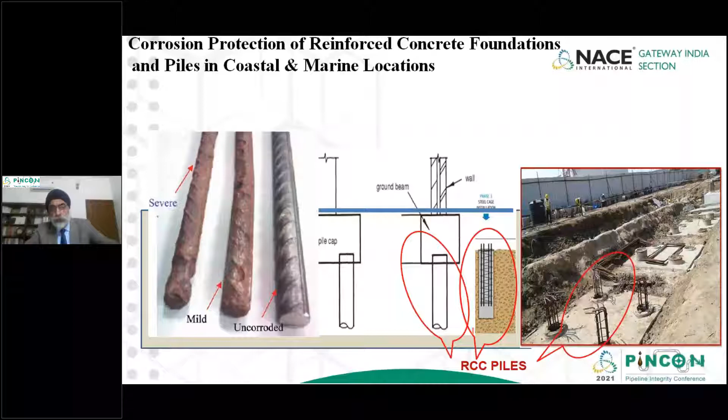Same way in refineries, specifically in the coastal area, as India is building a lot of new infrastructure, the pile caps which support above-ground storage tanks and heavy equipment need to be properly protected so that the rebars do not corrode, which can compromise the integrity of the pile caps or RCC piles, and thereby endanger structures like tanks from collapsing. Hence, ensuring proper corrosion protection of the steel rebars is extremely critical in today's environment.

As I said, reinforced cement concrete is highly stable because the reinforcement becomes passive due to the alkaline environment of the cement. So in normal cases, the steel reinforcement should not corrode - the cement acts like a coating to the steel rebars embedded in it.

But due to material limitations, design and construction practices, and severe exposure conditions of the soil - wherein a lot of chloride ions are available - the ions penetrate into the concrete cover and start the deterioration process of the rebars. As rebar corrodes, its volume increases, cracking the outer surface of the concrete and allowing moisture, chloride ions, and other corroding ions to come in contact with the steel, leading to rapid corrosion of the steel rebars.

So the photograph on the left hand side, you can see the cover of the concrete has completely gone. The rebars are exposed to the atmospheric environment, which also causes a high corrosion rate. This is the process which, as professional engineers, we have to stop. We have to stop the steel reinforcement in the concrete from corroding, to ensure the integrity of the pile caps, pile foundations, and equipment foundations in coastal and marine locations.

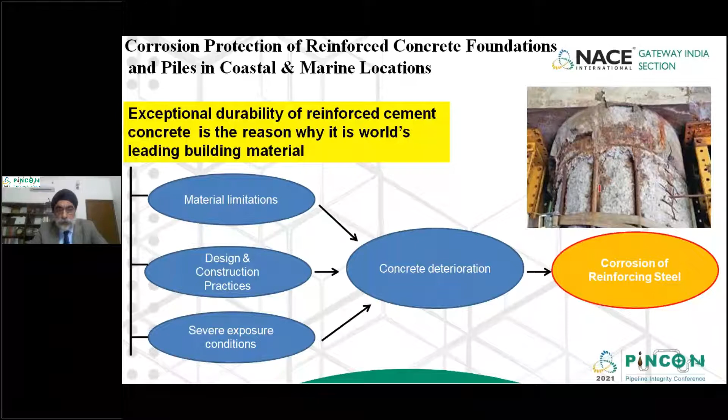Normally, steel in concrete does not corrode because the cement provides a natural protective film which prevents the steel rebar from corroding. The elements which cause corrosion on the rebars are primarily three: chlorides. Chlorides destabilize the passive film, leading to a localized breakdown and cause rapid corrosion on the rebar.

Above ground, carbon dioxide in the air basically penetrates through the concrete cover. It lowers the pH environment around the steel rebar, which causes the loss of the passive film on the rebar, and again starts the process of corrosion.

The third element in refineries which can cause corrosion on the rebars is DC stray currents. In refineries, cathodic protection of buried piping has become prevalent. Protecting the buried piping in a refinery or petrochemical environment can cause DC stray current corrosion on reinforcements near the anodic gradients. If proper design is not done for cathodic protection of the plant piping, it can endanger the concrete piles and pile caps which would be in the anodic gradient of these anodes.

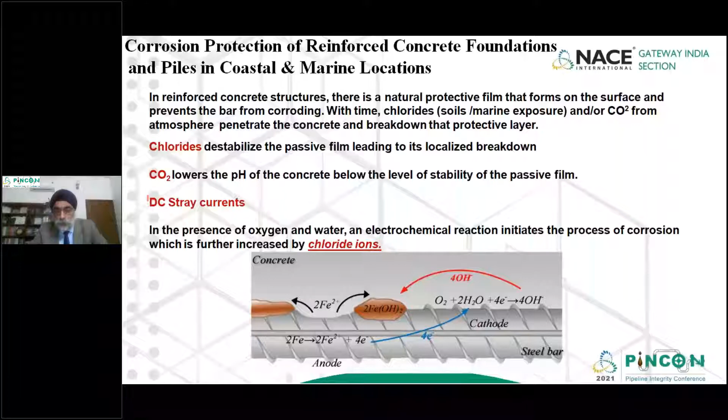So the design engineers should be aware that while trying to protect the buried steel piping, or trying to protect the tank bottoms of large storage tanks, we can cause stray current corrosion on nearby concrete structures, leading to rapid deterioration of these structures. These three factors should be kept in mind while ensuring that the steel rebars do not corrode, to ensure the long-term integrity of concrete structures in a refinery or petrochemical environment.

So typically, this slide gives you an idea. There is a rebar which is embedded in concrete. The rebar is showing no corrosion, and the integrity of the concrete structure is well maintained. Due to chloride ions over a period of time diffusing through the concrete cover over the rebar, this starts the process of corrosion.

When the corrosion process starts, the rust pushes the concrete up, leading to formation of cracks. When cracks get formed, it forms a direct path for the outside environment, which is primarily soil, to leach into the foundation and start accelerating the process of corrosion on the steel rebar.

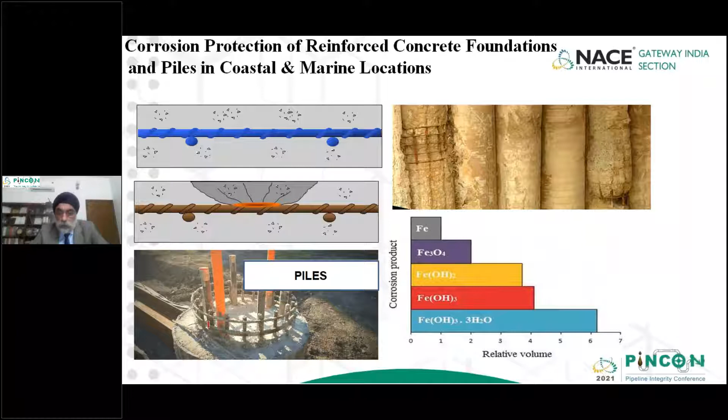This slide basically gives you an idea of what I've been talking about, how the rebar corrodes. On the left-hand side is the first photograph, showing a rebar indicating a passive layer, which is built due to the cement around the rebar. Over a period of time, in the buried structure, chloride ions diffuse, and on the atmospheric side, if the structure is partly buried and partly into the atmosphere, carbon dioxide in the atmosphere diffuses to the concrete.

Both these basically damage the passive film and start the process of corrosion. Chloride ions obviously start the corrosion process much faster compared to carbon dioxide impregnating through the concrete in the atmospheric zone. So when the chloride ions impregnate, they form rust.

The rust, as I said, is 6 times the volume of an Fe ion. That pushes the concrete and starts the formation of cracks. Now this becomes a repetitive cycle, causing the concrete to crack and eventually fall down.

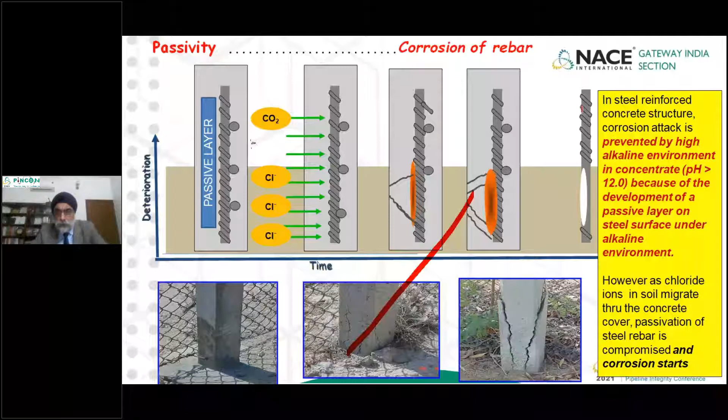Once the steel gets exposed to the environment, this is what is going to happen. The diameter of the rebar starts to reduce, and then eventually the reinforcement steel will collapse, causing the collapse of the concrete structure. This photograph exactly depicts what I've been telling you.

You can see how much is the reduction of the thickness of a rebar. So once this gets compromised, the entire concrete structure can collapse. As you would have heard in India many times, in Goa, we have seen bridges collapsing. It primarily collapses due to the reinforcement getting corroded in a saline atmosphere, and hence the necessity to ensure that

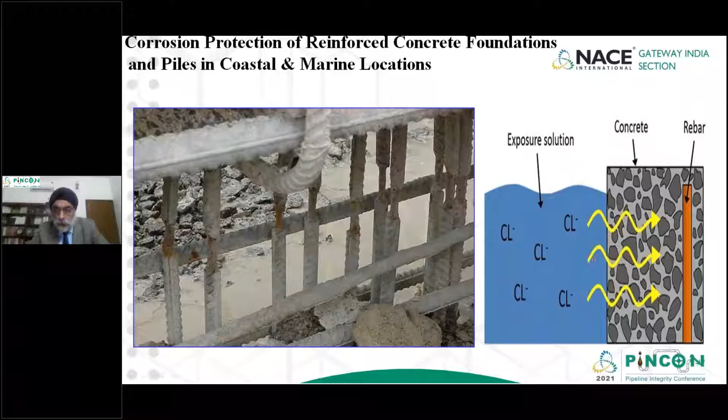Now this photograph again shows or conveys the same message which I have been discussing. Moisture enters through the hairline, rust begins to form. Rust, which is ferrous hydroxide, basically has 6 times the volume of the initial formation of the rust.

This pushes the concrete up and causes a complete breakdown of the concrete cover, exposing steel directly to the environment, leading to either crevice corrosion or pitting corrosion. Now, both these corrosions have very high corrosion rates. They are not dictated by normal corrosion rates.

The corrosion rates can almost be 0.5 to 1 millimeter per year. And if the rebar is about 16 millimeter or 25 millimeter, in 10 to 15 years in a corrosive environment, the rebar diameters can reduce considerably, which would compromise the strength of the concrete, causing a catastrophic failure.

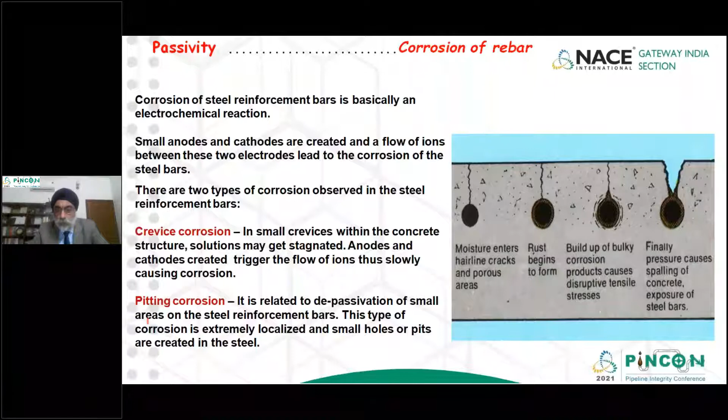Now, how do we check a concrete which is embedded partly in the ground and partly in the air, whether the rebar is corroding or not? So we all understand the science of measuring, in our terminology, what we do: pipe to soil potential. The same terminology or the same systems are used for checking what is happening on the rebar without removing the concrete. ASTM C876 provides a relationship between the measured potential values and the corrosion probability.

So what we do is we take a sponge, we take a copper sulfate reference electrode, put the sponge on the concrete, put the reference electrode in a copper sulfate solution so that proper electrical connectivity is made between the concrete and the copper sulfate reference electrode.

The copper sulfate reference electrode is connected to the multimeter the same way we would connect a pipe, and the rebar is connected to the positive of the multimeter the same way we would connect a pipeline. Now, the potential, what we read, if the potential is

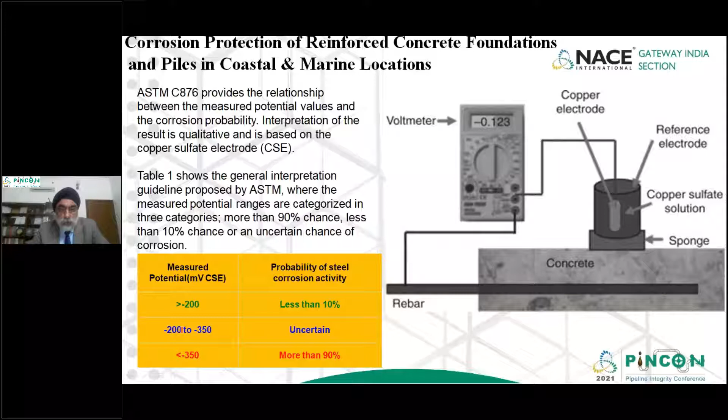So by doing this simple test, we can really find out if the rebar within the concrete is in a passive zone or is it in an active zone as far as corrosion is concerned.

Now, the way we have potential ranges of steel in soil, where we know that between minus 0.3 to minus 0.7, steel is corroding, but a potential of minus 0.3 volt in steel shows that the steel is cathodic, and minus 0.7 shows that the steel is anodic. Same way, by measuring the potentials of steel in concrete, we can find out what is the condition of the rebar in concrete.

Depending on the status of the concrete, it can either be humid but chloride free. If we measure potentials between minus 200 to plus 100 millivolt with respect to a copper sulfate electrode, it gives us an indication that the concrete is chloride free. If we are measuring potentials between minus 600 to minus 400, we know that the chloride is contaminated. If we are measuring between minus 1000 to minus 900, the concrete is saturated with water, but there is no oxygen. And if the concrete values are between minus 400 to plus 100 millivolt, the concrete is carbonated.

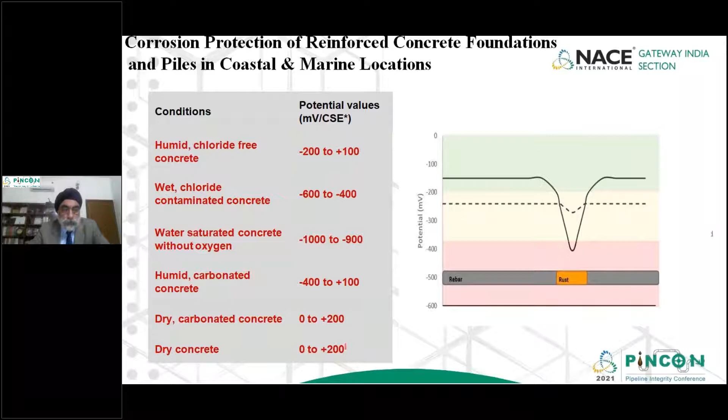So by logging in these values of the potential of steel in concrete with respect to copper sulfate electrode, we can find out the status of what is happening in the rebar, the same way we do measurements of pipe in soil. This is a very important test to be conducted by engineers to ensure that the steel in foundations or steel in pile caps are not corroding.

Now, having determined the status, we have to look into mitigation measures. Typically, the story is the same as we do in pipelines. What we do in pipelines, we have a coating. Apart from coating, we apply cathodic protection. So if you apply the same story onto a rebar embedded in concrete, the corrosion protection mitigation measures of rebars become very easy to understand.

So this is a rebar casted in concrete. The distance between the rebar and the outer surface of the concrete is called the concrete cover, and it is embedded in atmosphere where chloride ions are floating around, which can either be soil or an outside atmosphere. So how do you protect the rebar? Either you do a coating, or you apply cathodic protection, or you do a combination of both.

That's one strategy. The other strategy is to apply a coating on the concrete surface, between the concrete surface and the soil. Another strategy is to put in corrosion inhibitors, which would not allow corrosion to occur on the rebar and will keep the rebar in the passive state. We can also put in some chemicals within the concrete, which would reduce the permeability of the concrete, meaning it would not easily allow chloride or sulfate ions to move from the soil into the concrete and hit the rebar. So these are various strategies which can be adopted to prevent corrosion of rebar.

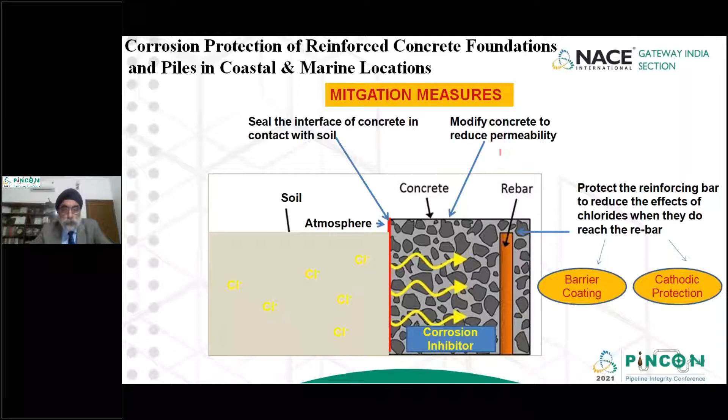The basic strategies anybody would adopt: use a high performance concrete which would inhibit moisture and chloride ions from hitting the rebar, provide coating between the concrete and the soil surface, called concrete surface protection. The third strategy would be to do a rebar coating, meaning you coat the rebar. The fourth strategy would be to do cathodic protection of the rebar. And the fifth strategy would be to put corrosion inhibitors in the concrete, which would keep the surface of the rebar passive.

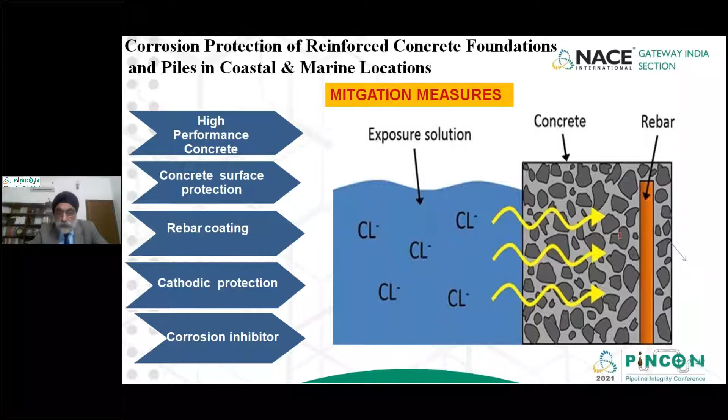I will not go in detail on this slide, but it gives various strategies which can be adopted in all these five points which I have discussed: high performance concrete, concrete surface protection, rebar coating, cathodic protection, and corrosion inhibitor. Within these five strategies, we have different sub-strategies which can be adopted to ensure the integrity of steel rebar in concrete. I will be focusing on FBE coated rebar, which is commonly used now in India, and galvanized rebar, which has also been used. Along with that, I'll show you some slides on how to do impressed current protection of rebar in concrete.

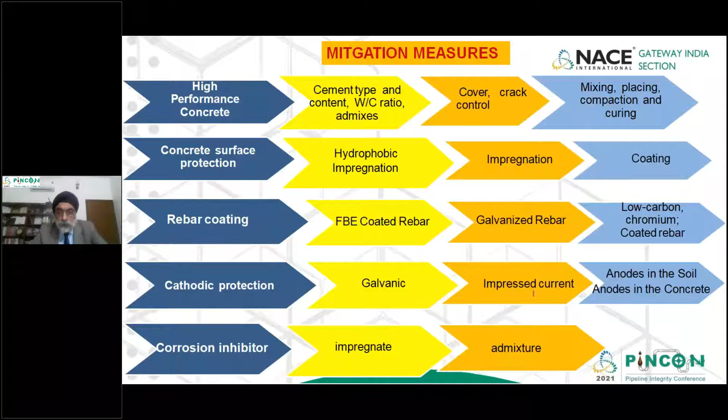The first strategy which a company would look into is to use a high performance concrete which would inhibit chloride, oxygen and moisture from traveling into the concrete cover and causing the loss of the passive film of the rebar. There are various strategies which can be used: to have a proper water cement ratio, to provide adequate cement cover, to have a high range water reducing admixture, curing the cover properly, and having a proper cement to water ratio, which I've already mentioned above.

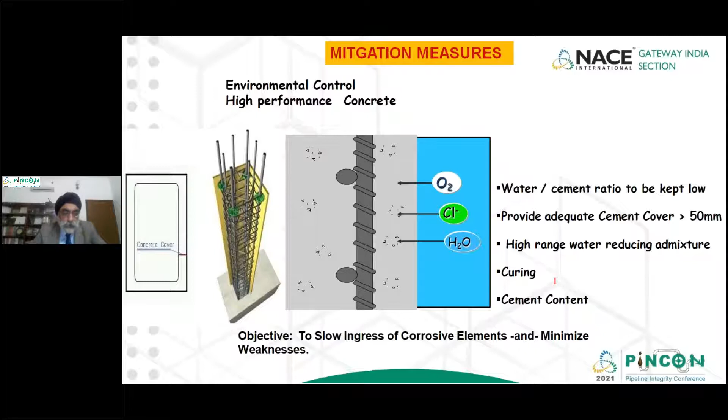The objective of this strategy is to slow ingress of corrosive elements into the rebar. Now we can reduce this by about 10 or 15 years, but eventually through the concrete these corrosive elements will hit the rebar and cause corrosion. So this is a mid-term strategy, not a long-term strategy.

The other strategy is to apply coating, which we typically call surface sealers and membranes in this technology. These membranes, basically a coating, will not allow oxygen, chloride, and water molecules to hit the steel surface. There are various types of sealers which can be used depending on the life and the cost. The objective is to block corrosive elements at the concrete surface.

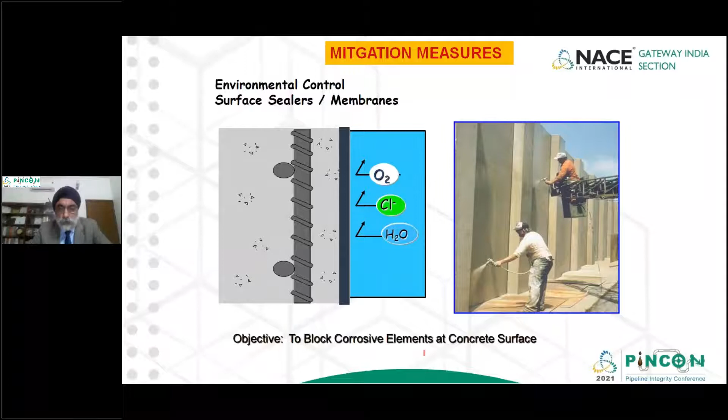Material selection: we can have a normal rebar, a corrosion-resistant rebar, a fusion-bonded epoxy rebar, or a galvanized rebar.

Mostly for buried structures, fusion-bonded epoxy rebars are used. Galvanized rebars are normally used for atmospheric conditions. Corrosion-resistant rebars are also not used for buried applications; they are normally used for above-ground applications.

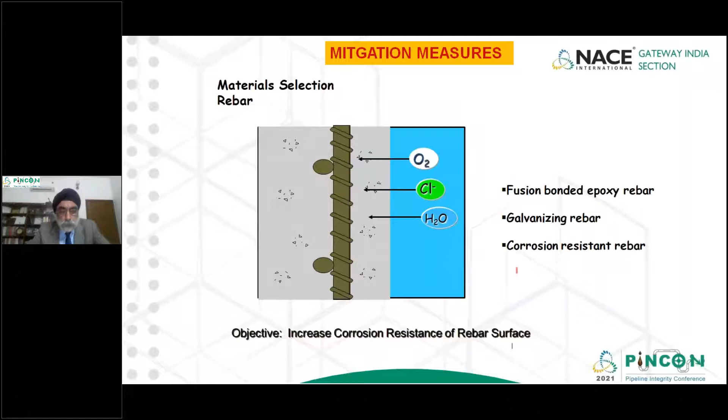One of the strategies is to use a fusion bond epoxy coated rebar, commonly used in many parts of India for constructing bridges in the marine or in a saline atmosphere. You would have seen green rebars in the construction of bridges.

This is a good strategy, but the main point to be noted is that during construction, the bending of the rebars has to be done properly, because if the FBE cracks when you are bending the rebar, then at the crack points steel gets exposed to the environment and can lead to accelerated corrosion.

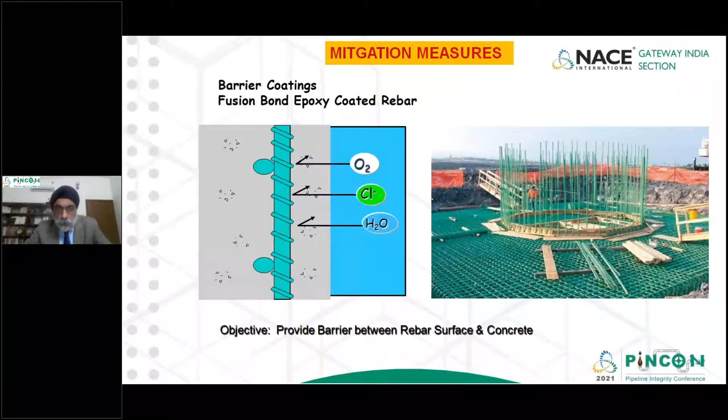The other strategy is to use galvanized coated rebar. This is normally used for above ground structures. Not being used too much in India, but commonly used outside India in many countries. There's a cost attached to it, but a galvanized coated rebar will provide the desired life to the structures.

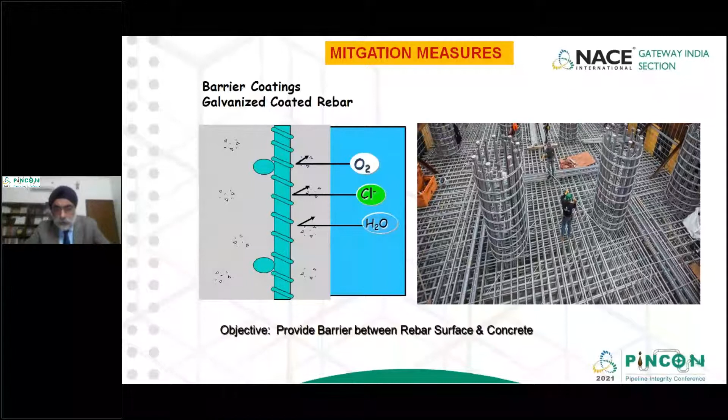Then for buried structures and also for above ground structures, another technology used when barrier coatings are not used is anodic and cathodic polarizers. These are basically corrosion inhibitors which ensure that the passivity of the steel is maintained, and even if oxygen, chloride, moisture enters the concrete cover, it would not cause corrosion on the rebars. Now this has a limited duration, can protect the rebars for 10-15 years, not a long-term solution, but this is also used on many structures which are being rehabilitated.

So a consultant has to decide which anodic and cathodic polarizers they want to use. But as I said, the life is limited.

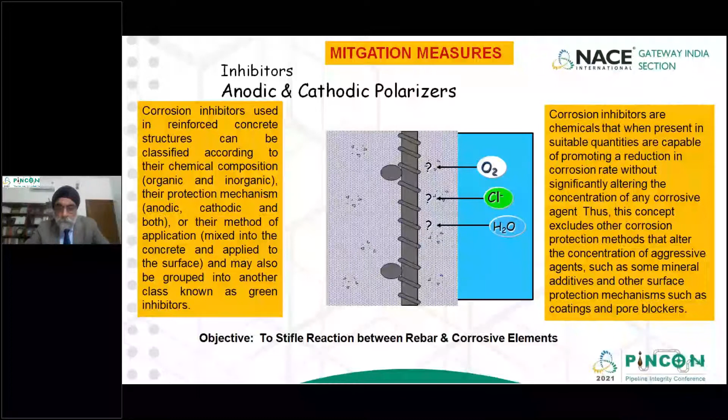Now, a commonly used system is using cathodic protection. As all of you know, we have either impressed current cathodic protection or sacrificial cathodic protection. Both technologies are used for preventing corrosion on the rebars. In impressed current cathodic protection, we can use anodes which are embedded in the concrete, or we can use anodes external, that means kept in the soil, for structures which are below ground.

ICCP is a very common technology. Obviously, when the structures are above ground, the only option available is to put the anode within the concrete. You can't put it outside because there is no means for the current to get delivered in an atmospheric condition.

The sacrificial systems are also used, but they have a limited life and they are embedded within the concrete. On the left-hand side, the photograph is of a MMO mesh anode. On the right-hand side, the photograph is of a zinc anode embedded in concrete. In both these solutions, the anodes are embedded within the concrete.

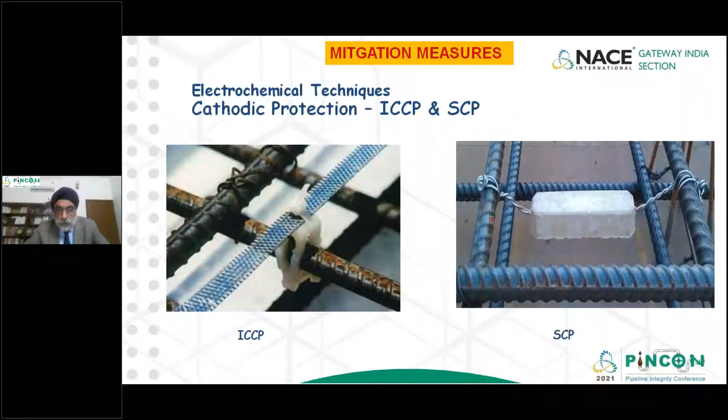This photograph particularly shows sacrificial anodes which are embedded within the foundation or within a pile. Each anode has a limited area; it will not cover a very large area. It would typically cover 1.5 to 2 square meters.

So if you are using a sacrificial system for protecting your structures, you need to be very clear that it will only protect about 1.5 to 2 meters square. So a large number of anodes have to be embedded in the concrete. The photograph shows, in a small area, they have embedded almost 5 zinc anodes.

There's also a solution where you put a zinc mesh around the pile cap or pile foundation if it is above ground, and then put a concrete layer over it so that the zinc mesh gets embedded.

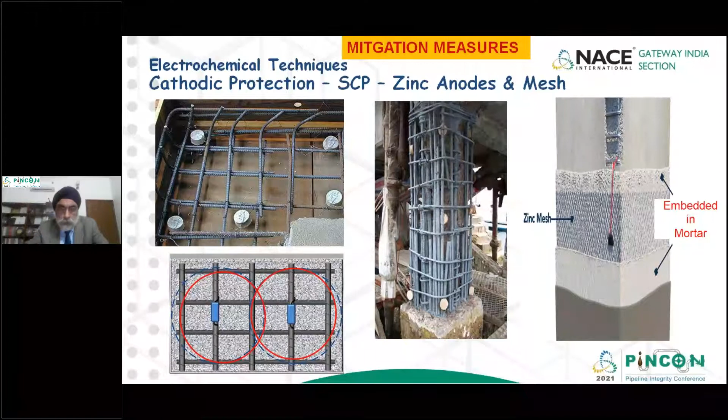The zinc mesh is electrically connected to the rebars, and the zinc mesh continues to provide current and sacrifices itself but does not allow the rebars to corrode. You can see some photographs of zinc anodes which have been embedded on a structure where the rebars have completely corroded. So this is the zinc anode.

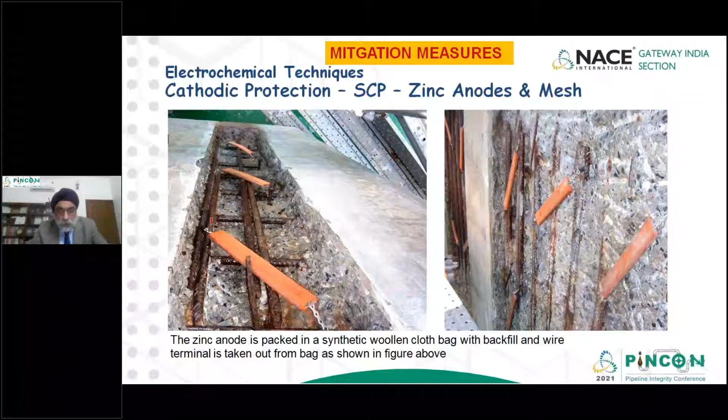Around the zinc anode, a synthetic woolen cloth bag with a backfill, the way we provide bentonite gypsum in our zinc or magnesium anodes which are embedded in soil. Same way we are putting in a backfill which would retain the moisture and allow the zinc anodes to deliver current to the rebars. So here the concrete has been removed, the anodes have been installed, and the area will be repaired by putting in cement. Now these anodes will prevent further deterioration of the rebars.

When you put in a mesh within the concrete, we get a uniform current distribution because the mesh anode is very close to the steel rebar. When we are putting in a MMO tubular anode in soil, the design has to be proper to ensure that there is a uniform distribution of current on the rebar.

Otherwise, the impressed current system will not work properly. Only a certain element of reinforcement will get protected, and the other areas of rebar will not get protected. So for soil-based anodes, the proper design has to be done to ensure a uniform distribution of current in the concrete structure.

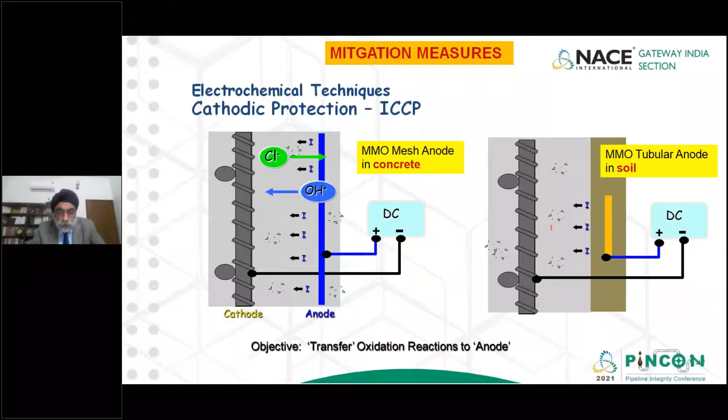The entire foundations of the iconic Burj Khalifa Tower in Dubai, the entire structure below ground is protected by ICCP. The whole purpose of providing ICCP was to ensure that the foundation does not corrode for a design life of 80 years. And ICCP is the only solution which would provide such a magnitude of design life.

Using ICCP for CP of reinforced concrete structures is a very sophisticated technology. There are NACE standards written around it. There are ISO standards written around it. So in case any asset owner wants to use this technology, proper designs are required, and it's a mature technology to protect rebars.

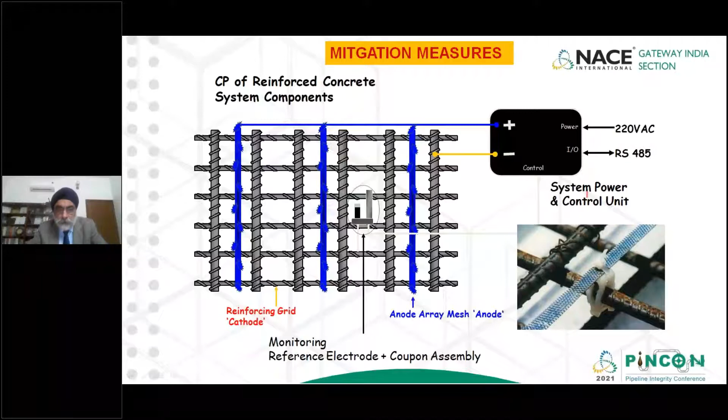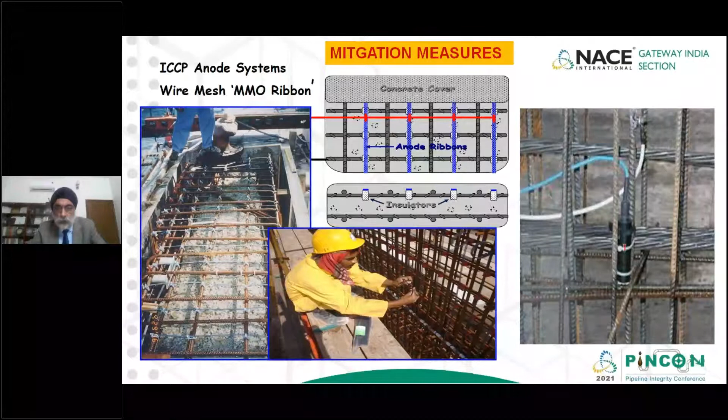Now, the current densities which we normally design vary from 0.2 to 2 milliampere per meter square. Where the reinforcement is not passive, and we suspect that the chloride ions will continue to impregnate through the concrete into the rebar, then we design based on much higher current densities, which could range from 2 to 20 milliampere per meter square.

So depending on the type of soil, depending on the type of concrete we select, depending on the type of rebar we are using, the current densities could range anything from 0.2 to 20 milliampere per meter square. So selecting the right current density is very important in ensuring that these reinforced concrete, if protected by ICCP, remains in a passive state for the entire design life.

There is the ISO standard 12696, which can be referred to understand which type of, or how much, current densities are required to be impressed onto a concrete foundation depending on the environment.